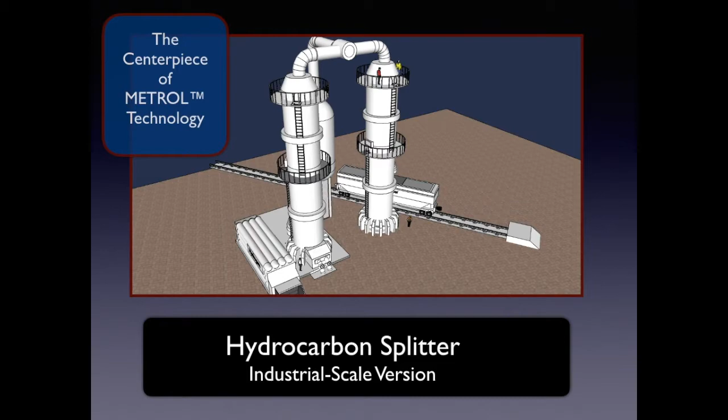Are you ready to hear about it? Okay, here we go. This new thing is called the HydroCarbon Splitter. We call it that because it splits hydrocarbons, typically methane gas or natural gas, into the constituent elements, hydrogen and carbon. It does so in a revolutionary new way that's both uniquely clean and highly profitable.

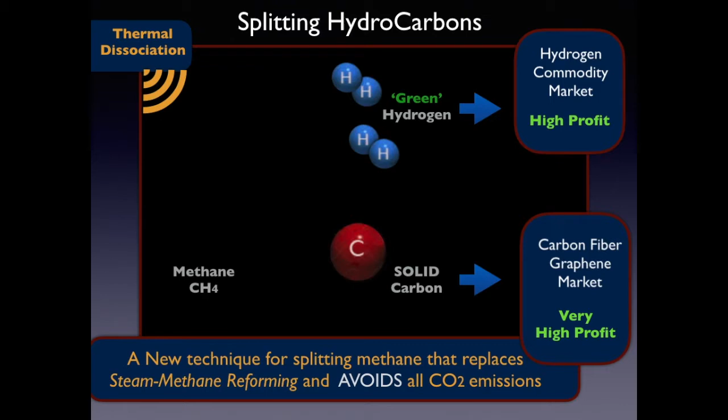It could whimsically be called the environmental cash cow. But equally important to making big profits is solving the big environmental problems, especially climate change. And in this respect, the hydrocarbon splitter has absolutely unique potential because of its ability to profitably clean the atmosphere and financially incentivize the process.

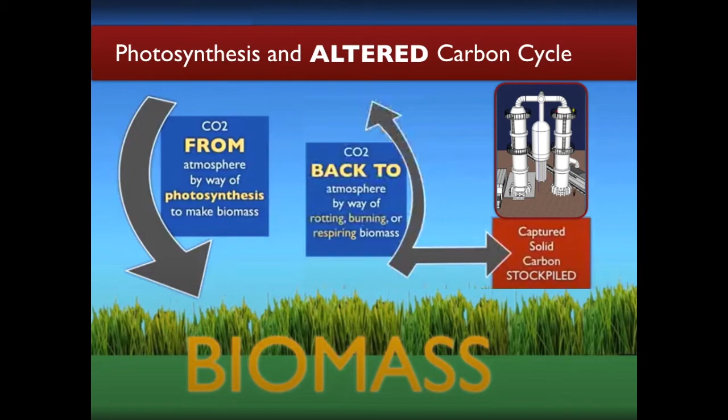There are currently no hydrocarbon splitters yet in operation. The developers of the technology are looking for a beachhead for the first installation. The question then becomes, where should we install the first units? We're going to present 4 possibilities here that illustrate the wide-reaching benefits to our society and economy.

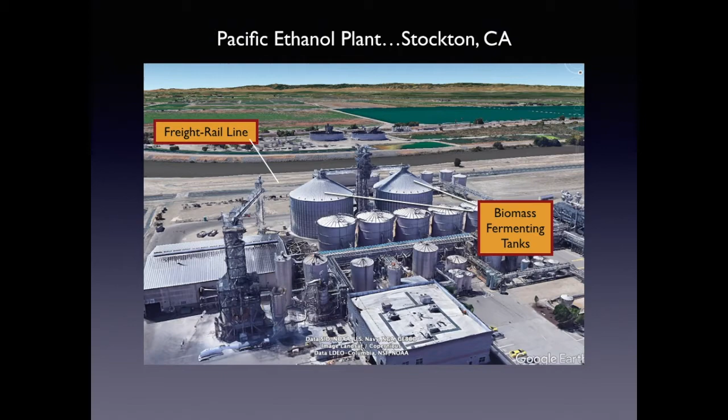Our first proposal for where to initiate hydrocarbon splitters is the quickest and cheapest of all the options: the ethanol plants in the Central Valley of California, a rich agricultural region with huge supplies of ag waste and livestock poop, which is the perfect feedstock for making methane. It's already zoned for industry, which means permitting and red tape are minimized. It already has freight railway infrastructure and already contains much of the needed processing machinery.

The main problem with ethanol plants today is that the profit margins are now painfully low. Hydrocarbon splitters could radically change this situation because hydrogen, fuzzy fiber carbon, and graphene can sell on the open market for much more than ethanol. We can also add in Metrol production, the new zero-emission liquid fuel that replaces gasoline. This opens the door to much greater profit.

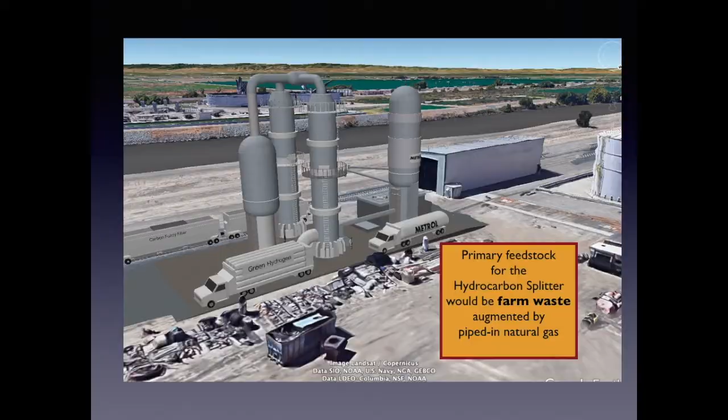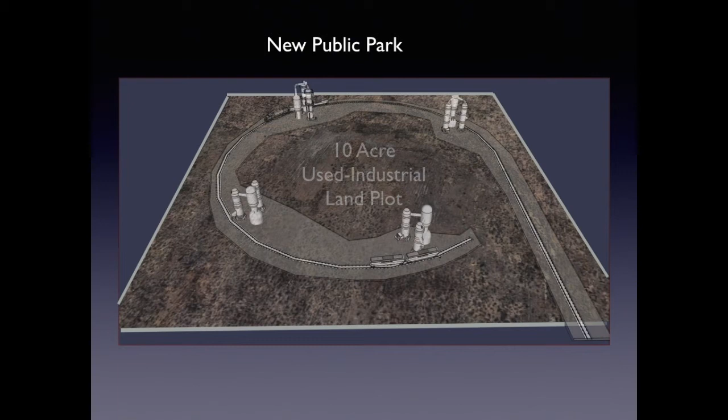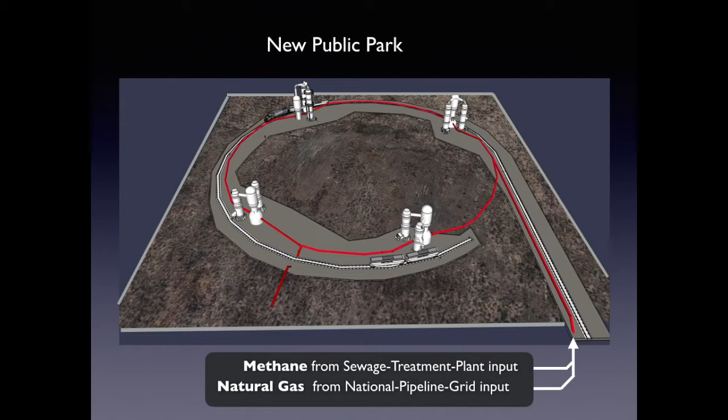Our second design proposal for implementation of hydrocarbon splitters involves incorporating them into a 10-acre park in a place where normally the real estate costs would be too high for a new nature-preserved recreational-style park. In this design, we see multiple hydrocarbon splitters arranged around a circular freight rail track. The red pipeline depicted here is for methane and natural gas input. The methane comes from a nearby sewage treatment plant plus on-site biomass processors.

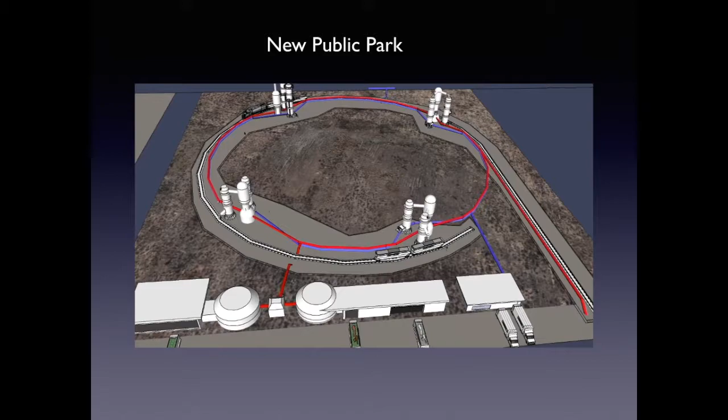The hydrocarbon splitters separate the methane gas into pure hydrogen and highly valuable solid carbon for making carbon fiber and graphene. The hydrogen is shipped out in the blue pipeline, while the carbon is loaded into and shipped out by freight rail cars. On one side of the park, we've got trucks delivering locally collected biomass and all forms of solid waste from which to make methane. Nearby, other trucks pick up hydrogen for delivery to markets.

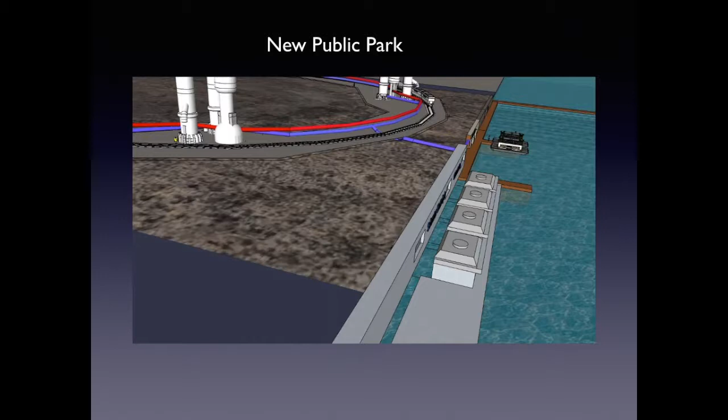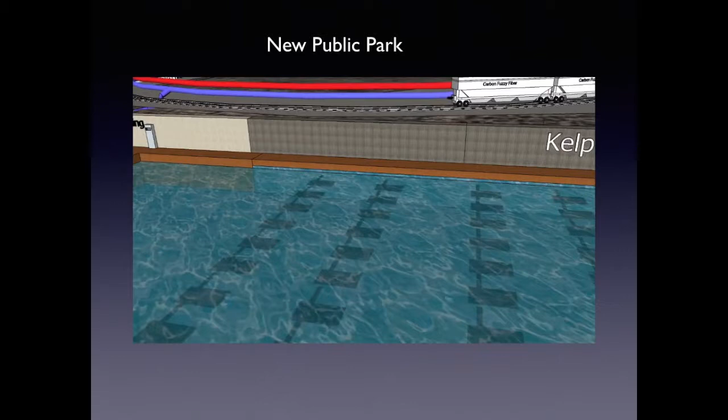On the other side, on the waterfront, we have a new kind of electrolyzer that can make high-pressure hydrogen from seawater. Next door is a hydrogen ferryboat dock and refueling station. Next to that is a kelp farm for use in creating biomass feedstock for making methane.

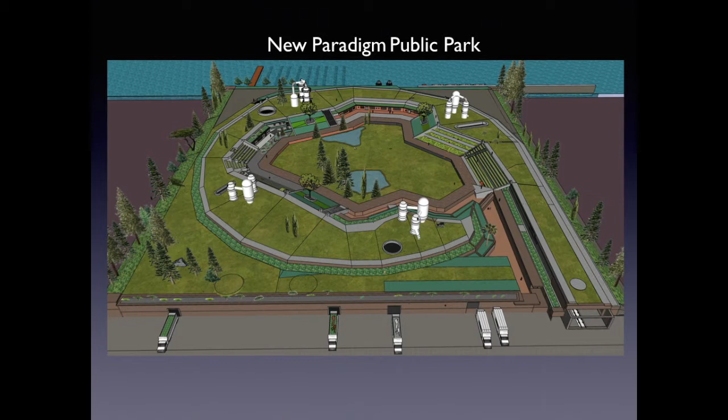After the industrial infrastructure is up and running, we cover it all up with well-ventilated planted berms, landscaped gardens, and trees. In a post-pandemic economy, here's a project that would create lots of needed jobs. In this version, we include an amphitheater and music performance space, retail space, a playground for kids, and a rock climbing wall.

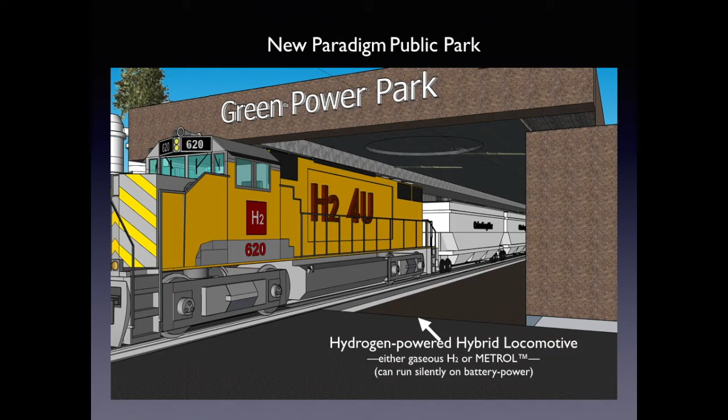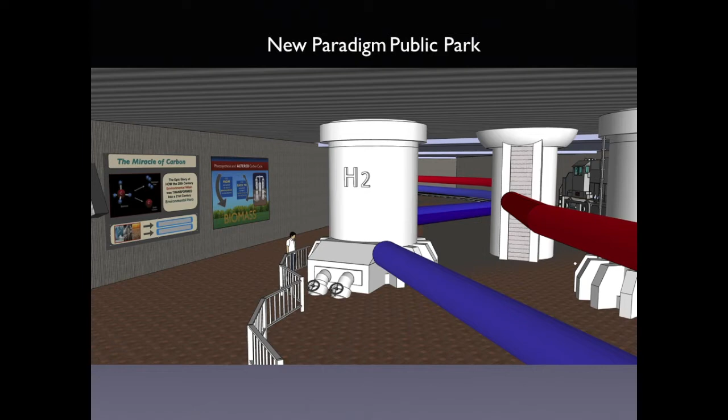Here you can see the train entrance to the tunnel, which actually has over 128,000 square feet of usable space inside. There would thus be ample room here for a museum on green industry. The idea here is that if industry becomes clean, it doesn't need to be separated anymore from nature access, or recreation, culture, and education. Clean industry could thus propagate multitudes of city parks.

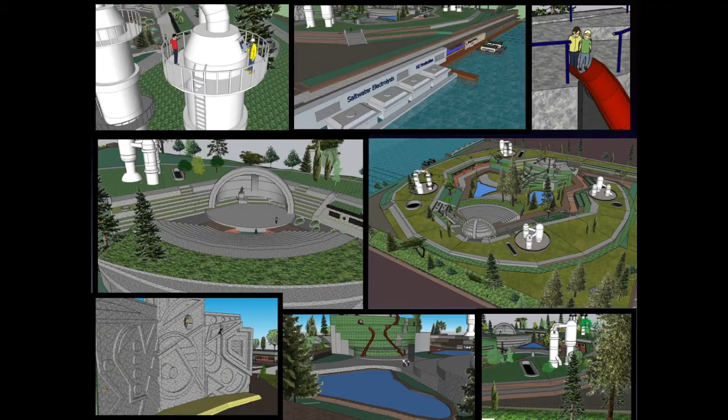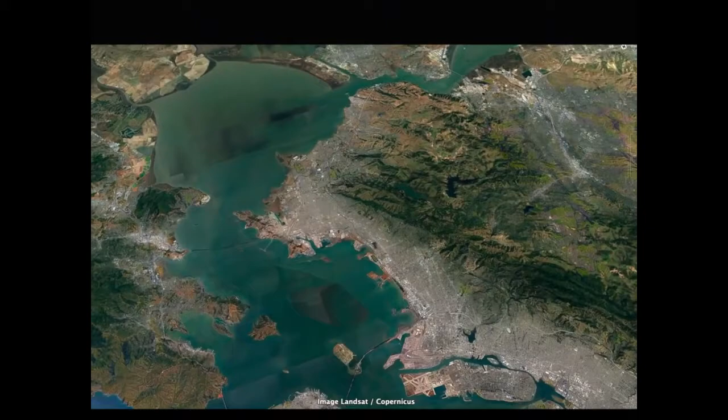A third ripe location for hydrocarbon splitters and methanol production plants is oil refineries. Here's the Chevron oil refinery in Richmond, California, a prime example. If you've been reading up on industry trends, you'll know that because of both climate change and the plummeting price of renewable energy, the fossil fuel industry is in a challenging situation right now.

Internationally prominent economic analyst Jeremy Rifkin bluntly states that the fossil fuel civilization will collapse by 2028. This is because of basic market forces.

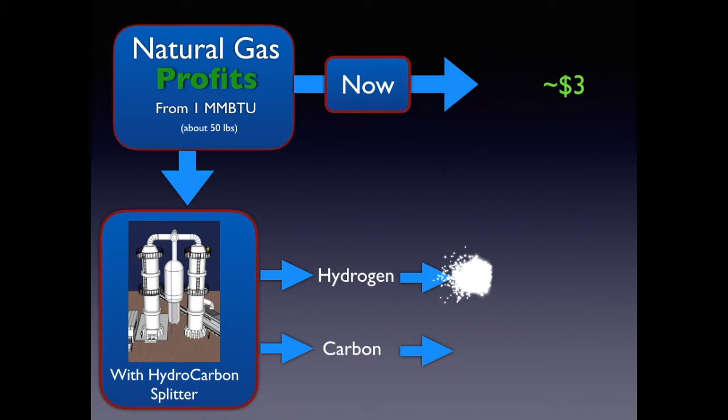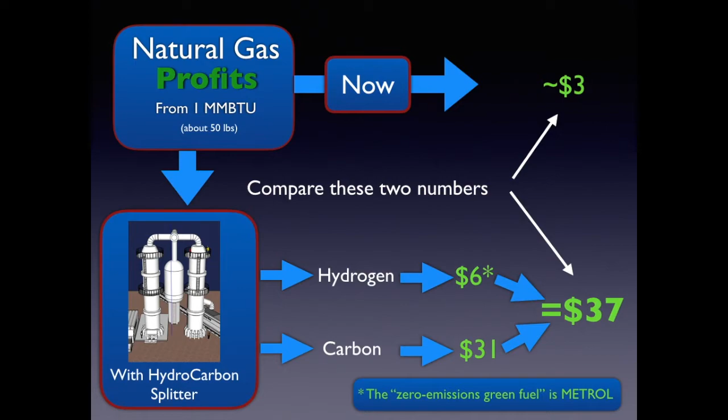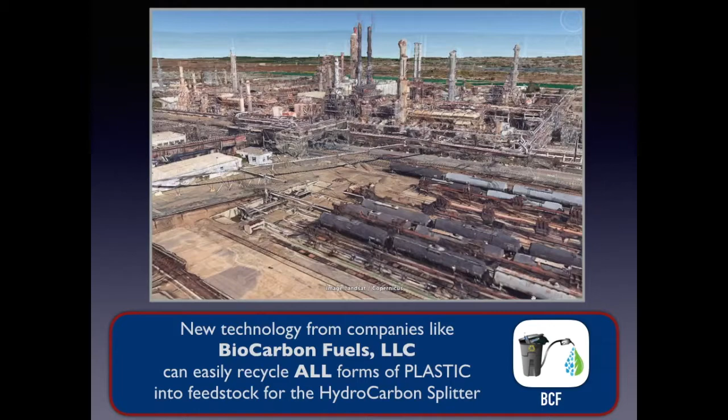Metrol technology is a solution for the fossil fuel industry on multiple fronts. First of all, it could completely decarbonize natural gas and make it a zero-emissions green fuel that is not only cleaner, but much more profitable than it is now. Like the power park, it could also function as a waste disposal center that solves and profits from our nasty plastics disposal problem. Importantly, there'd be huge public relations payoff to a company like Chevron becoming a green energy company.

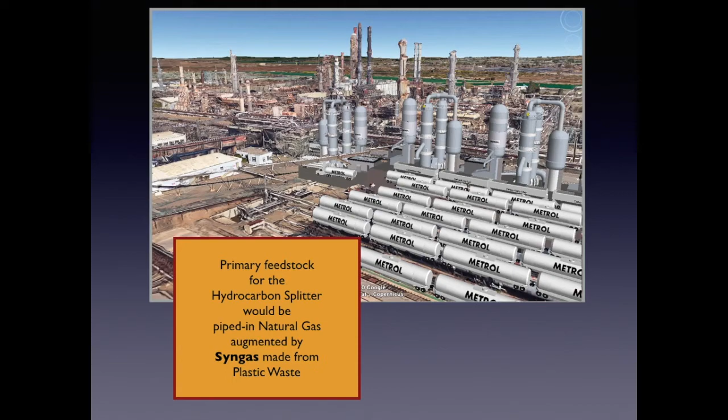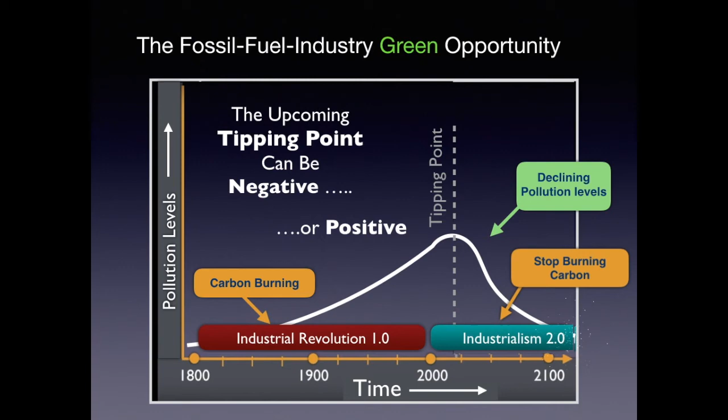Burning of hydrocarbons, even natural gas, is not zero emissions. The hydrocarbon splitter is a zero emission step in the transition to renewable feedstocks. Contrary to what most environmentalists think, the fossil fuel industry can adapt to the changing times by making clean Metrol instead of gasoline.

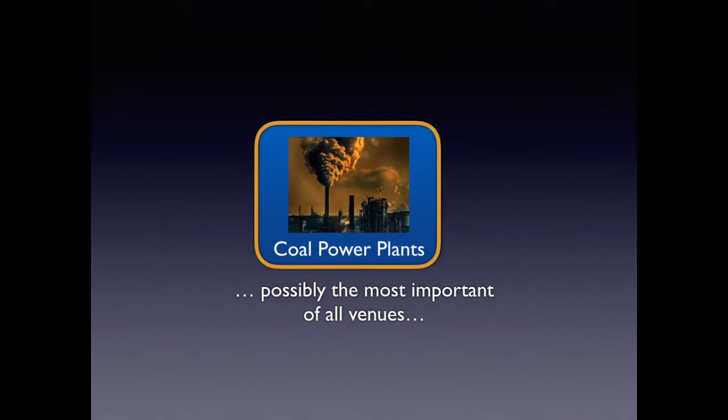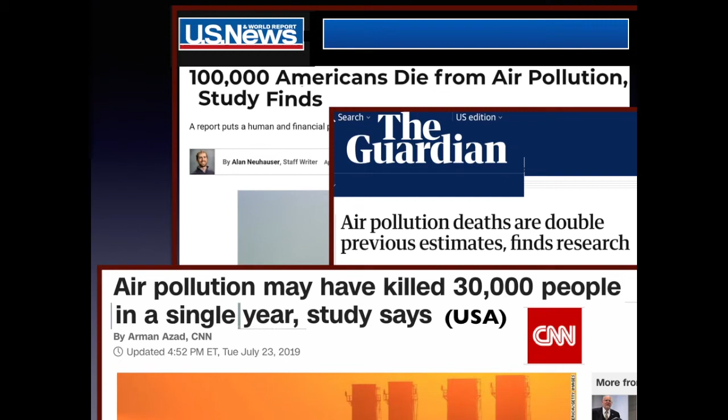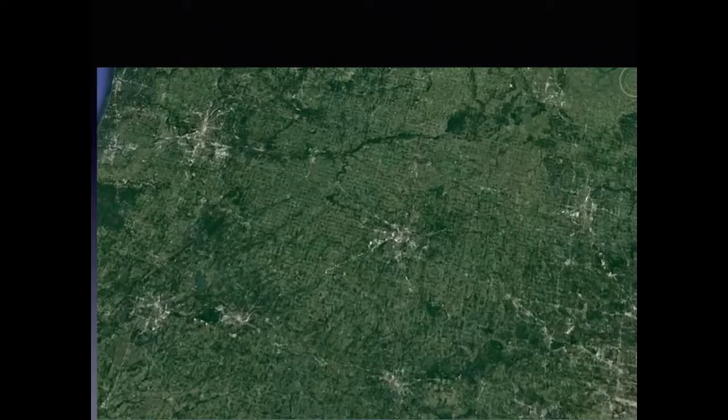Retrofitting all coal plants to burn green hydrogen instead of coal would completely solve this problem. Coal plants with giant smokestacks and long trains that bring in huge amounts of coal each day are the problem.

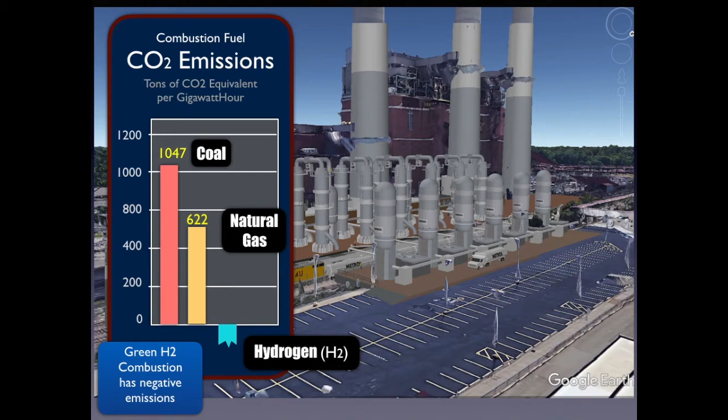Many coal plants are changing to less expensive natural gas. But look at how much cleaner it could be with hydrogen. Here we can see coal collection yards transformed to a bank of multiple hydrocarbon splitters, cleanly making hydrogen from both piped-in natural gas and methane from waste, including plastic wastes.

Besides making electricity by cleanly burning the hydrogen, the plant also could contain large-scale methanol production capacity. Clean trains now carry methanol outbound to markets as a replacement for gasoline and diesel fuel.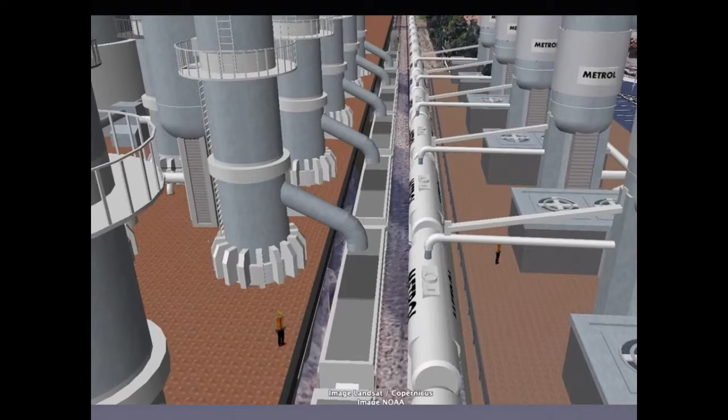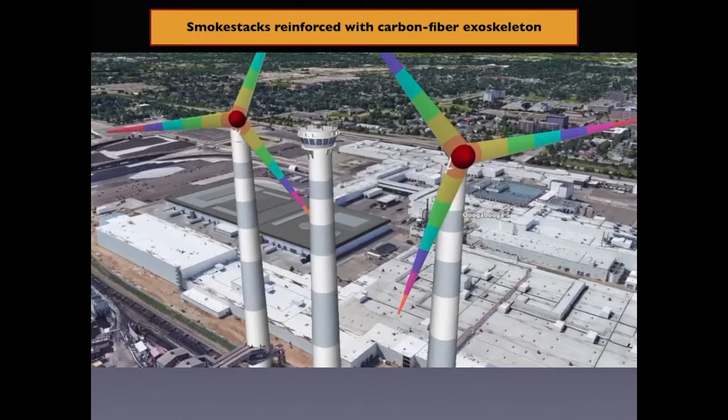Because a dirty power plant has now been fundamentally transformed into zero-emissions clean industry, a giant air cleaning device no less, it could now become a tourist attraction that includes a museum and a green industry learning center. In many locations, 600-foot smokestacks could be turned into large wind turbines, plus a highly popular observation tower affording breathtaking views of the surrounding region.

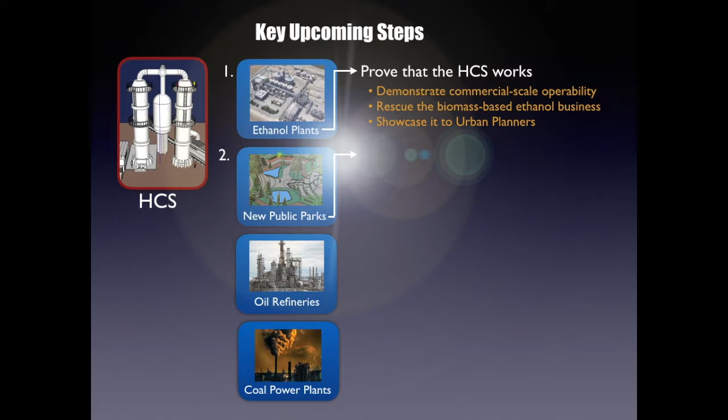In conclusion, the hydrocarbon splitter is the clean yet profitable technology we've been waiting for. It can now motivate us to quickly retrofit and upgrade the outdated and dirty 20th century industrial infrastructure that is now causing such great environmental damage.

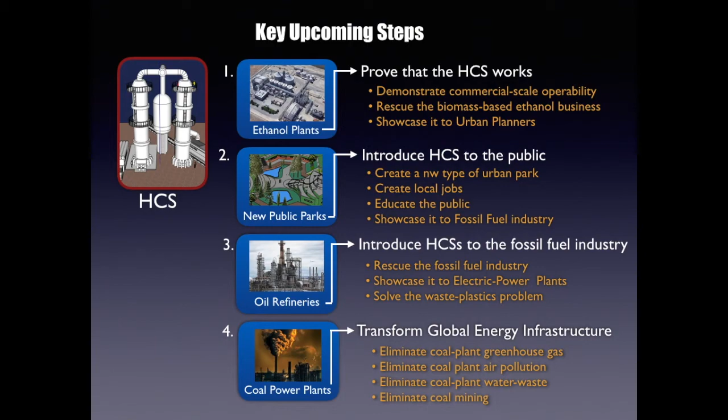Combining it with the new solid waste processing technology from biocarbon fuels, it could solve the plastic waste nightmare that is now impacting our oceans. It could potentially solve the climate crisis because we won't have to wait for and spend the money on all new energy infrastructure.

With methanol fuel, we can turn existing transportation vehicles and existing power plants into not just zero-emission machines, but air cleaning devices that could completely rid the world of both smog and greenhouse gases.

Contrary to prevailing and outdated belief, a brand new energy technology does not need to be a financial burden on our society. It could be a historical financial boon, creating large profits, huge numbers of jobs, and largely in place within 10 years. Bottom line, with the stakes now being what they are, we simply can't afford not to explore in depth something this promising.